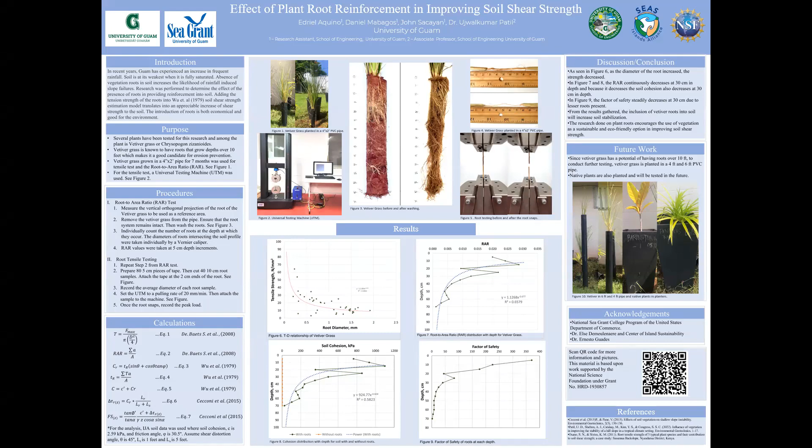Guam has experienced an increase in frequent rainfalls in recent years. When soil is saturated, it becomes weak. It is known that vegetation has the ability to absorb water in soil and to stabilize the soil. With the absence of plant roots, the likelihood of rainfall-induced slope failures increases. Through the soil estimation model, we can evaluate the root's potential to provide shear strength to soil. In conducting this research, we hope to encourage the use of vegetation as a sustainable and economical option in slope failure prevention.

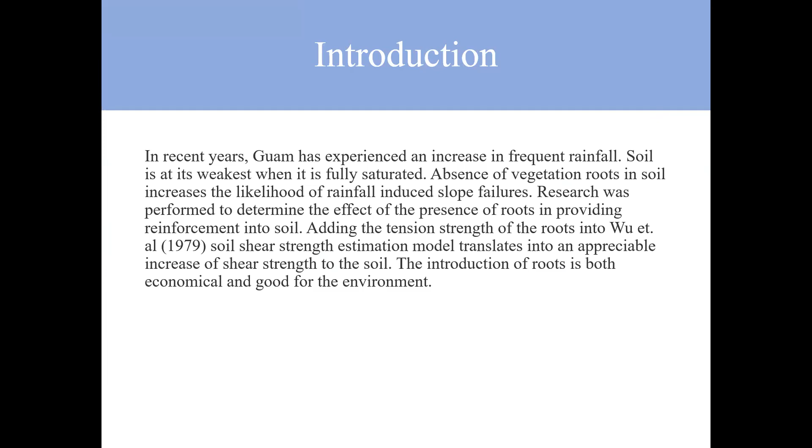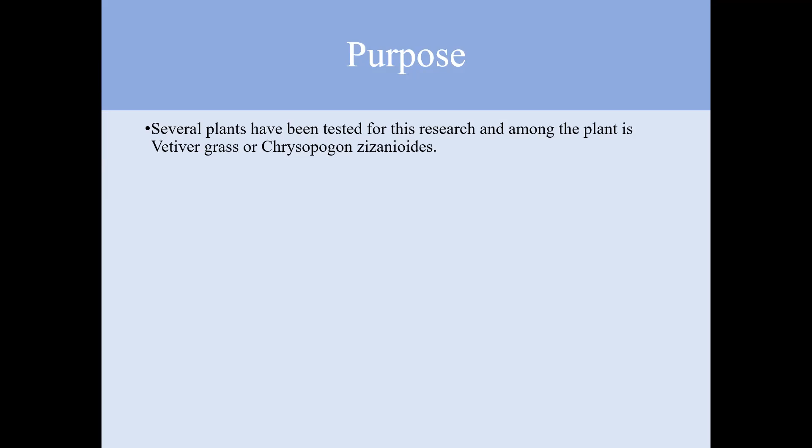Now, moving on to the purpose of this research. In our previous presentation last year, we presented on Pandanus Tectorius's capability in soil stabilization, and since then we have been actively testing several plants, and for our poster we chose to present on vetiver grass. Vetiver grass is known to have roots that grow over 10 feet, which makes it effective in erosion control and is used in watershed restoration projects in Guam.

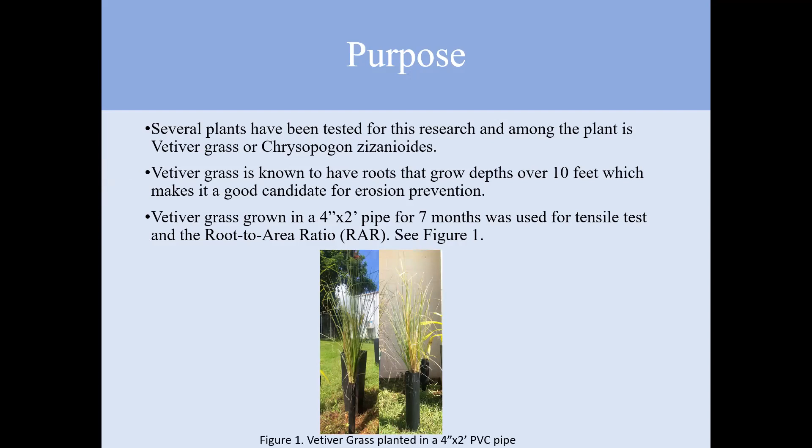For the RAR test and the tensile test, we used vetiver grass that was grown for 7 months in 4-inch by 2-feet PVC pipes. The tensile test was done using the Universal Testing Machine, UTM for short.

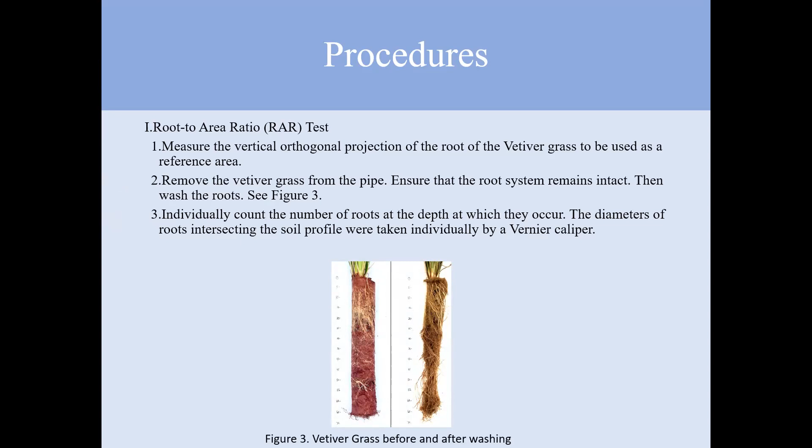For RAR, we began by measuring the vertical orthogonal projection of the vetiver grass to be used as a reference area. Then we removed the vetiver grass from the pipe and ensured that the root system remained intact. Then we washed the roots. After washing, we individually counted the roots at the depth at which they occur, and the diameters of roots intersecting the soil profile were taken individually by a vernier caliper. We recorded the RAR values at 5 centimeter depth increments.

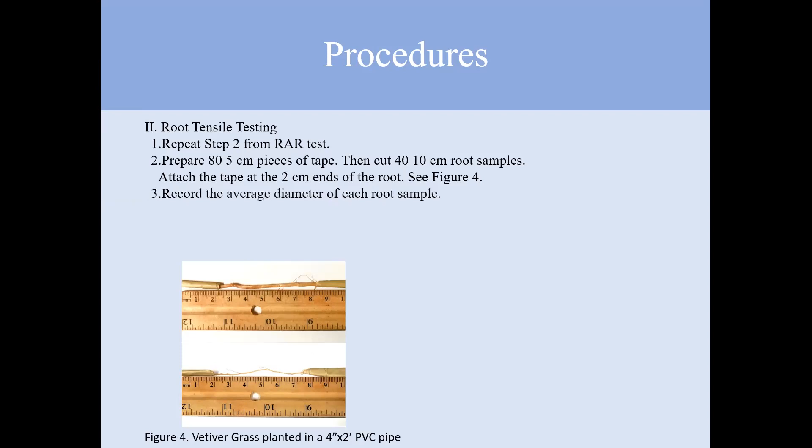Now to do the root tensile test, we used a second vetiver grass and repeated the same method as the RAR test in removing the root system. We prepared 80 5-centimeter pieces of tape and cut 40 10-centimeter root samples, attaching the tape at the 2 centimeter ends of the root. We recorded the average diameter of each root sample. Before attaching the root, we set the UTM at a pulling rate of 20 millimeters per minute, then attached the samples to the machine. Once the root snapped, we recorded the peak load.

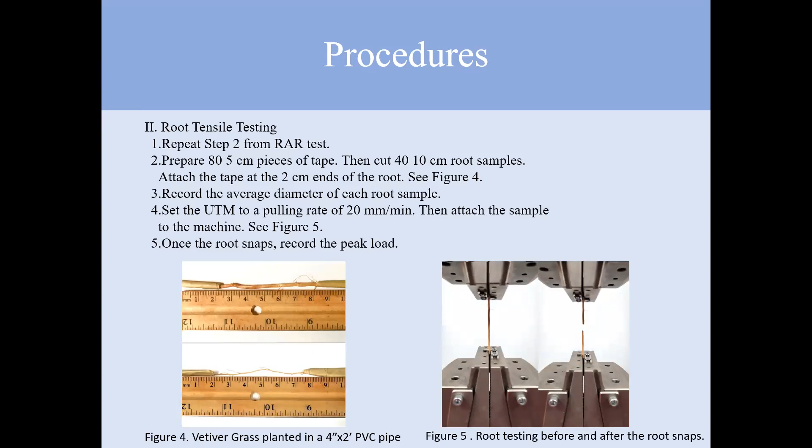For calculating our results, we use these following equations. Equation 1 is used to calculate T, root tensile strength, where Fmax is the maximum force and D is the mean root diameter. The root area ratio can be calculated from equation 2, where lowercase a is the cross-sectional area of root and uppercase A is the reference area.

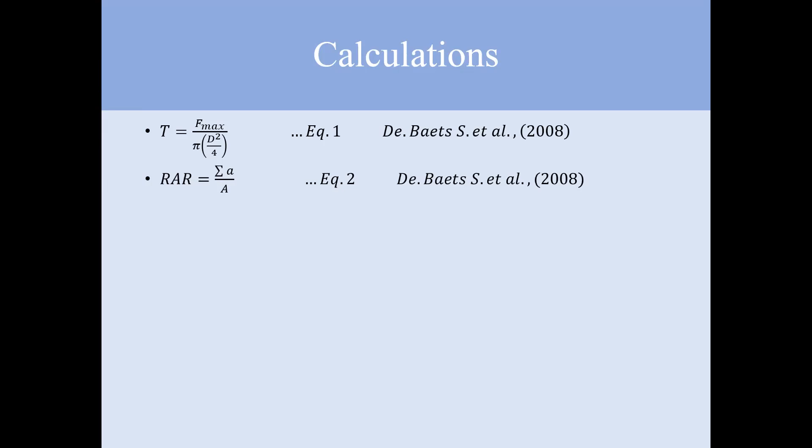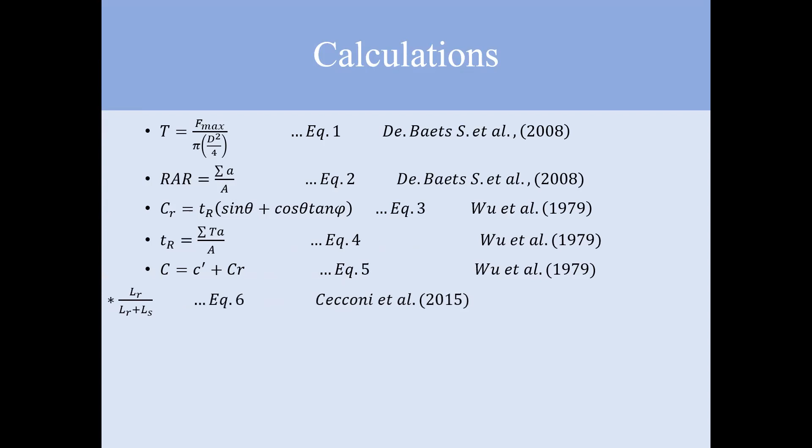The predicted shear strength increase from a full mobilization of root tensile strength is given by equations 3 and 4. And finally, in equation 5, the increase in soil shear strength can be expressed as an additional cohesion, where C prime is soil cohesion without roots, capital C is the cohesion of soil with roots, and CR is the increase in shear strength. The factor of safety at each depth of the root system can be obtained using equations 6 and 7.

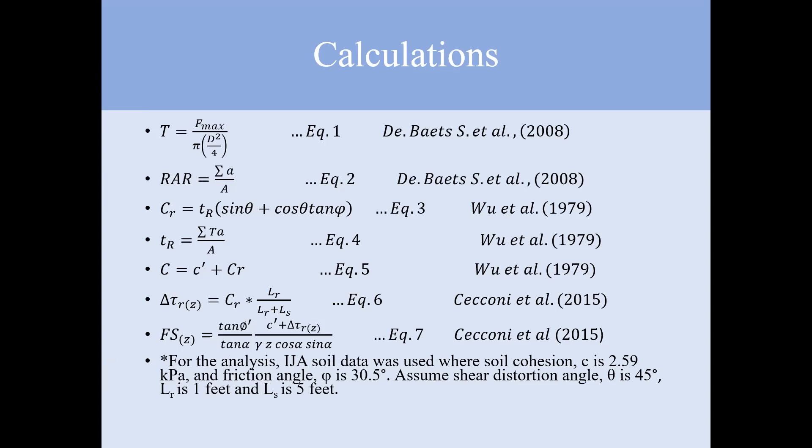For the analysis, IJA soil data was used for soil cohesion. C is 2.59 kPa, and friction angle is 30.5 degrees. Assume shear distortion at angle theta is 45 degrees, LR is 1 foot, and LS is 5 feet.

The tension diameter relationship for the vetiver grass is shown in Figure 6. As you can see from the curve formed in the graph, the tensile strength decreases with increasing root diameter, and it follows the power law equation of the form f(x) equals a times x to the power k, which we can use to predict the strength of the root.

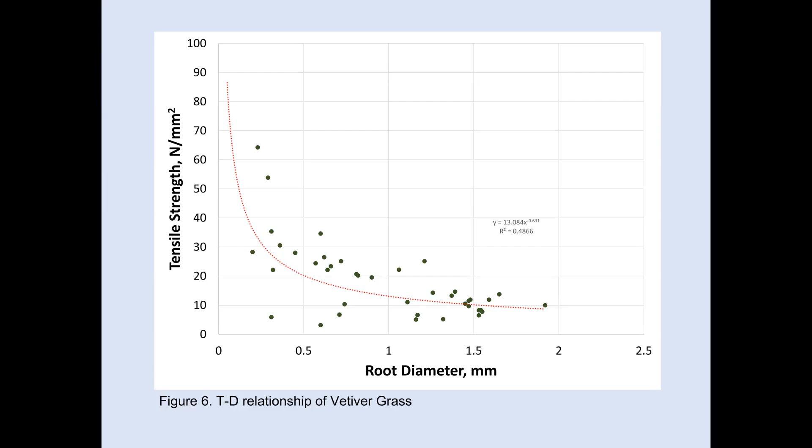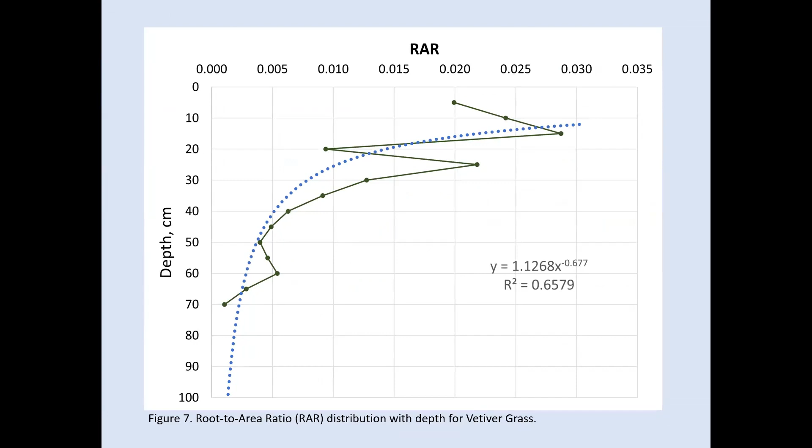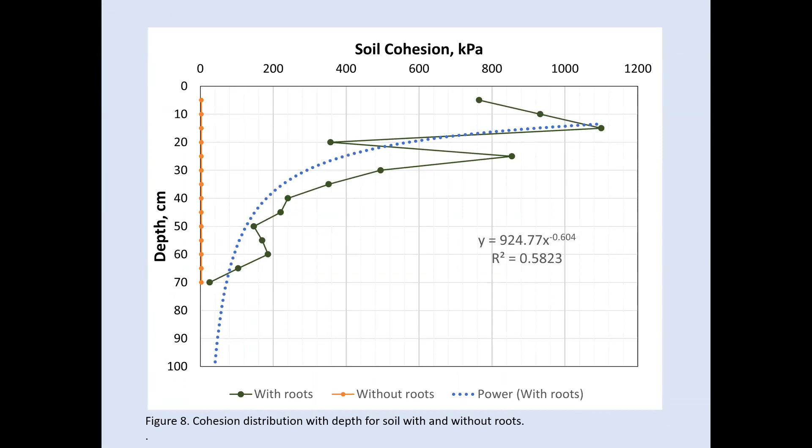In general, vegetation growing along hill slopes have shallow roots, therefore unable to reinforce the soils to stop landslides occurring at 1 meter depths. Thus, vegetation capable of growing deep roots more than 1 meter should be introduced to reduce the frequency of shallow landslide occurrences. These vegetations should have high values of RAR. In a short span of time, vetiver grass is able to provide ample shear strength to soil based on the results gathered, and will continue to provide more shear strength as it continues to grow.

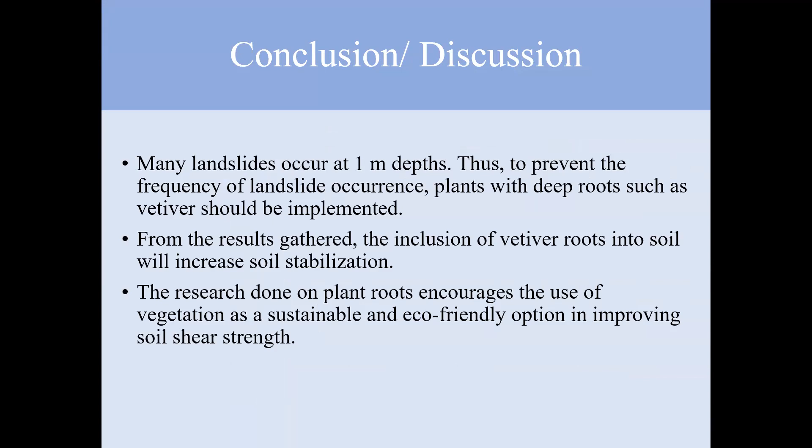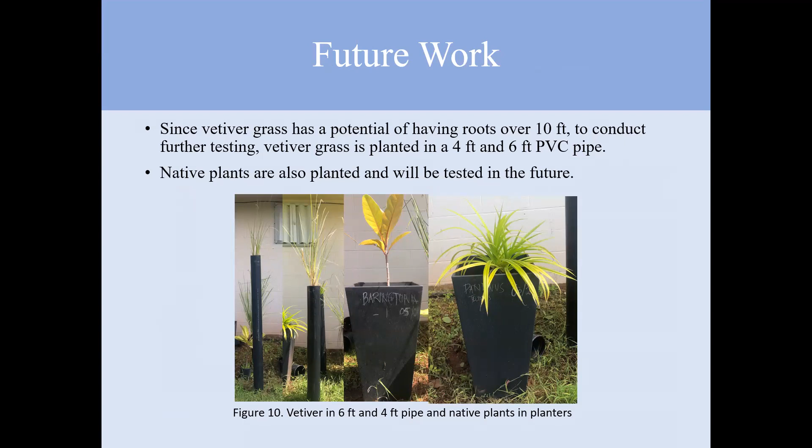Therefore, to further evaluate the reinforcement offered by vetiver roots in soil stabilization, we are currently growing vetiver grass planted in 4-feet and 6-feet PVC pipes, and will be testing them in the future among the other native plants we are growing.